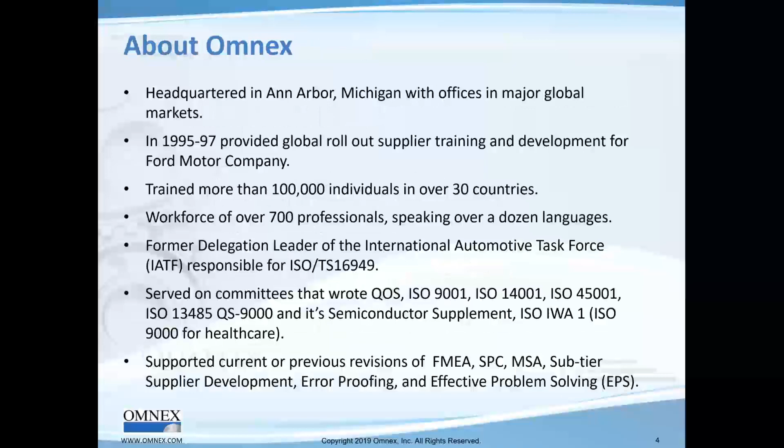So let's get going here. You all know Omnex was founded in 1985, about 33 years ago, and we focus on management systems, integrated management systems, Lean Six Sigma, and many other standards. One of the things I'd like to always point out when I do these webinars is about the global nature of Omnex and how we're able to provide services around the world for our customers, who need to, in fact, one of our customers with 26 different languages.

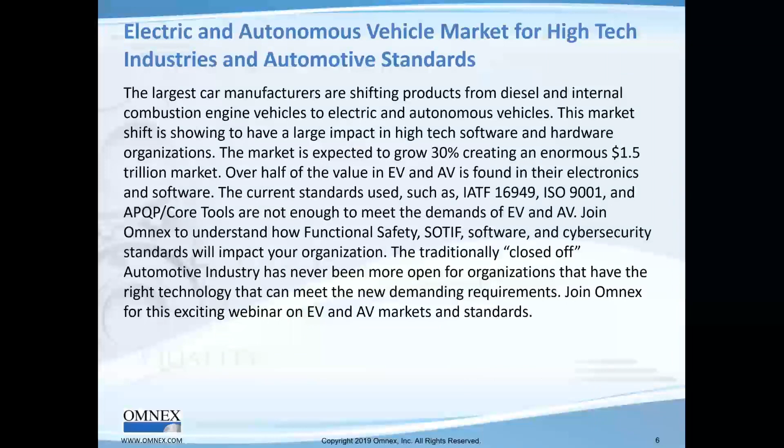All right, let's get right here to the webinar. The electric and autonomous vehicle market for high-tech industries and automotive standards. So what we'll do, we'll talk about what's motivating this change, the change towards safety, electric, and autonomous vehicles. I really lightened the next section on the AV and EV basics, and I'm planning to spend more time on the 7 pillars of electric vehicle and autonomous vehicles. And then we'll close the webinar, and we'll take a few questions as time permits.

Okay, so what is going on in this electric and autonomous car market? Simply said, it is countries phasing out gas and diesel vehicles. Here are some countries that have banned gasoline and diesel cars: England, China, France, India, and so on. There's a whole other list also, by the way. We just took some of them.

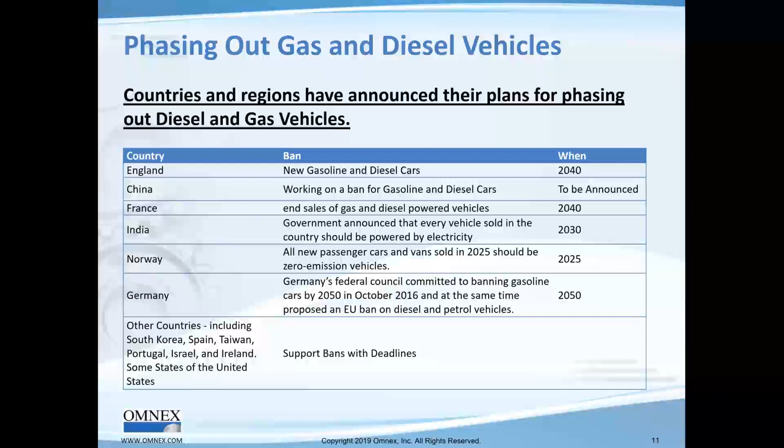So with this happening, what's also happening is GM has announced they're going all electric. They're going to phase out gas and diesel powered cars. Volvo, by the way, I happen to be in Sweden today as I do this presentation, where Volvo is pretty much in Gothenburg, where I am, is the company where I'm at right now. So Volvo says it'll end gas-only cars, and Volkswagen too. Really, in the end of the day, if GM and Volkswagen, the two largest car companies, have announced that this is the end of the combustion engine and it's going to go electric, pretty much you can expect everybody else will follow, and they are.

So let's look at the announcements that we're seeing. Here are the targets for electric vehicles by OEMs. Look at FCA, 28 new electric vehicle models by 2022. Mercedes-Benz, 10 new EV models by 2022, 25% of the group's sales planned by 2025. And so on, Toyota, more than 10 new models by early 2020s.

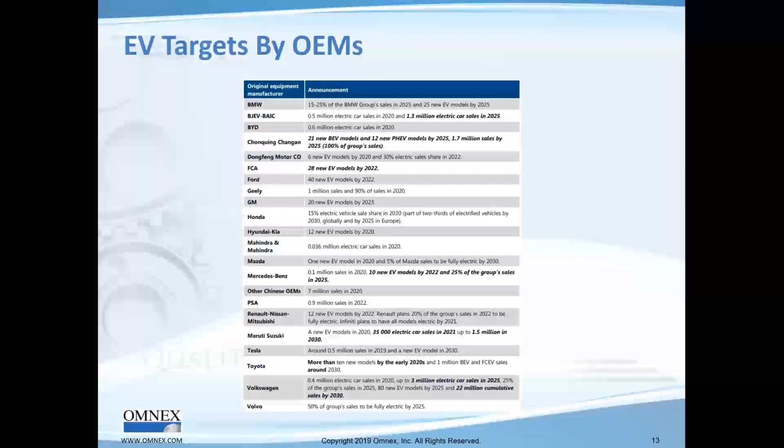So before that, what has been happening, let's say for the last 10 to 15 years, is a tremendous amount of safety going into cars. And of course, it was all cemented by this announcement in 2016 between the US Department of Transportation and 20 OEMs, with the agreement to make automatic emergency braking systems, okay? Backup cameras. In fact, there's a number of innovations from the last 10 years that have been rolled out, and I'll show you that a little bit later, that have come into the car.

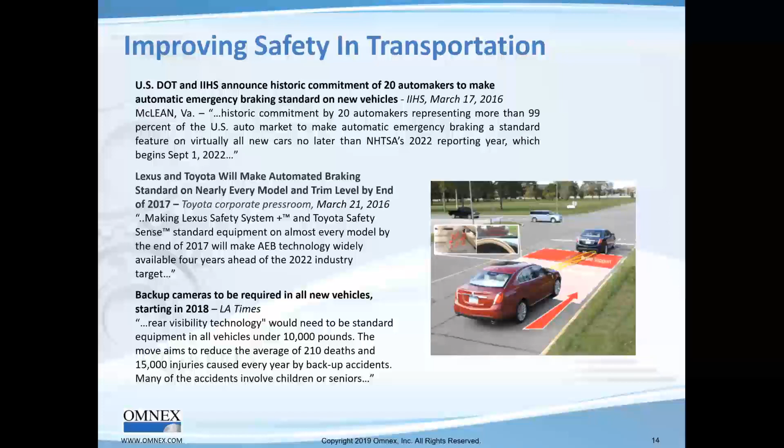So what is this? At the same time this has been happening, the electronic content in cars, both hardware and software, has been increasing tremendously. Between 2020, with about 35% of the car being electronic, it's going to go as much as 2030, 50% of the car being hardware and software. A tremendous amount of income or revenue being shifted from the traditional car makers to the electronics, hardware, and software car makers.

This is one of the reasons we're seeing a lot of new entrants coming into the automotive industry. As I mentioned in the summary for this webinar, this is the most open time in terms of somebody trying to enter into the car market. This is the time, if you have the right technology, the right innovation, and the right management systems in terms of being able to produce functional safety, cybersecurity, ASPICE, this is a wide open field for companies who are able to do that.

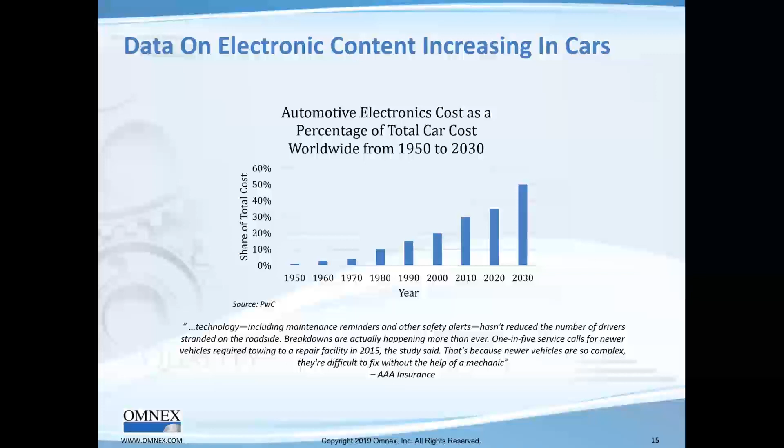So, safety coming into the car, the electronic content increasing in cars, of course, what can you expect? At the same time, what the car companies are seeing is an increase in the number of warranty recalls due to software. Those numbers say 15%, and it goes back to 2016.

I did some work with a truck OEM, and what they told me is they're seeing much higher percentages in terms of software recalls. In fact, he said 50% of their recalls are software related. So software is coming to be one of the key areas that the automotive industry is focusing on. And so you can just imagine that's why we're seeing things like ASPICE and, of course, Part 6 in ISO 26262.

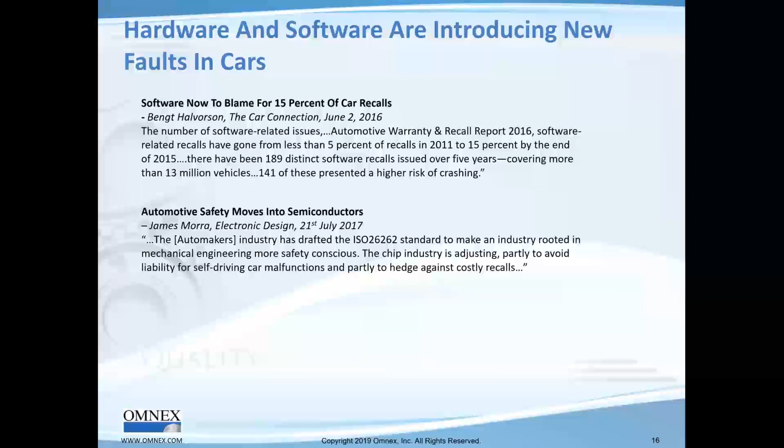All right, let's move on. So going on, in terms of understanding the shift into electric vehicles, suddenly you're seeing all these global alliances and agreements happening. So what is the bigger picture of the change that's happening today? The bigger picture, of course, is that electric vehicle is where the car industry is starting, with the goal of going into autonomous.

In fact, we facetiously say in the conferences for autonomous vehicles that there's a gold rush on. And indeed, the car company that's able to come up with a level 4 or level 5 autonomous car really is going to clean up. It's a huge amount of revenue. In fact, 1.5 trillion is what we're looking at in terms of the autonomous car market.

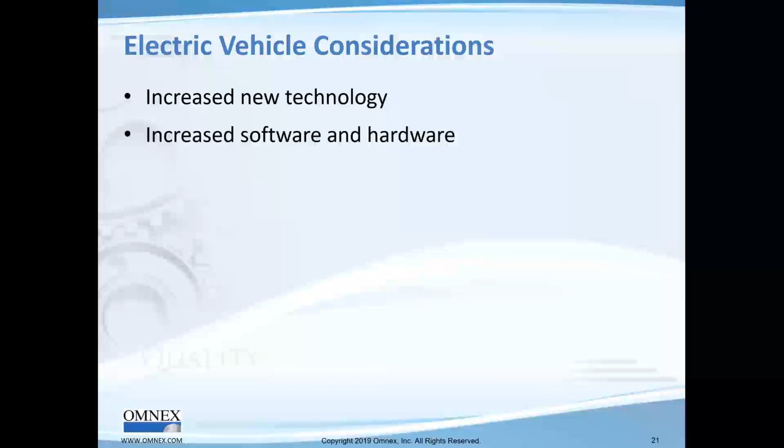All right, so I think it's very clear to all of us what then is the motivation for all of us, the OEMs going electric, and then of course for all of us in the supply chain, also being implicated and also having to change.

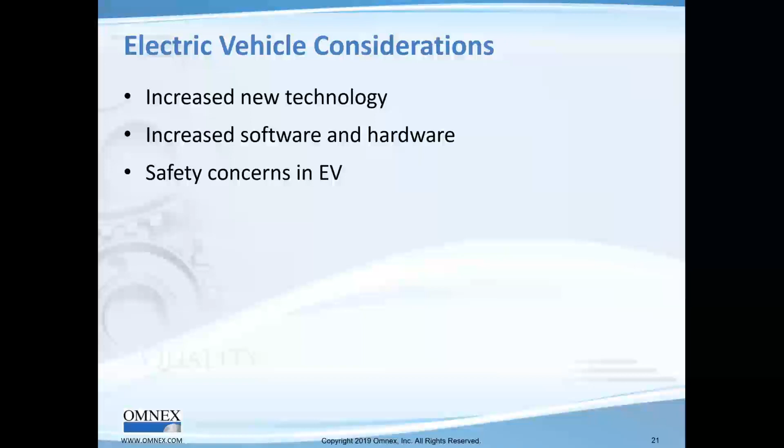So what then is the impact of these electric vehicles? It's the increased new technology, increasing amount of software and hardware. Let me just say, the electric vehicles of today are very, very connected. And when they're connected in this fashion, definitely there's cybersecurity. As soon as you talk about high voltage, and the power modules and the battery, a tremendous amount of functional safety is needed also. And there's also supply chain.

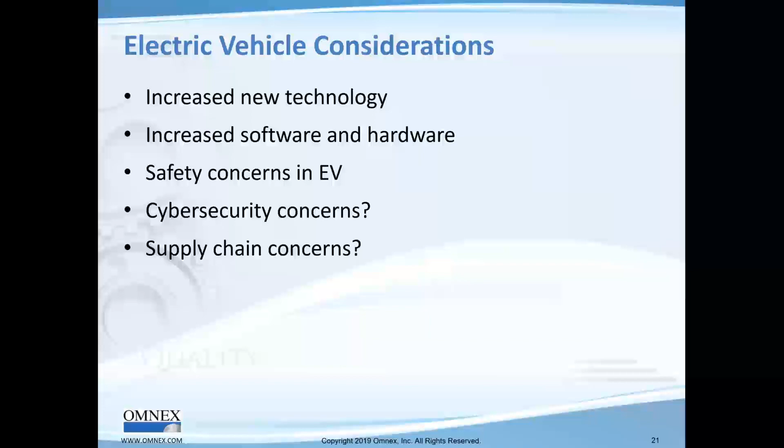And General Motors, though it's gearing up for a lot of electric cars, is using the Super Cruise features right now in a mechanical Cadillac. Okay, it's a mechanical car is what I meant to say.

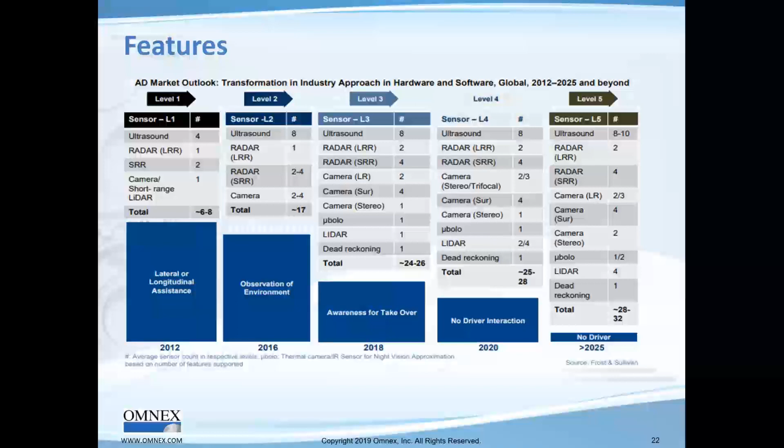Those are examples of level 4, or a vehicle operating autonomously on the highway. Going from level 3 to level 4 is a big deal, but going from level 4 to level 5 is an even bigger deal, because a level 5 vehicle is going to be able to operate in any different environment. So that's the idea of going from level 1 through level 5 - let's take a look at what has happened in the last several years.

Remember I talked to you about ADAS, the active safety and driver assistance. Look at the number of safety features that have come out, again in 2016, and then you're looking at 2018. You're seeing a lot of things in terms of highway driving.

And then in 2020 is when they're seeing the advent of what they call the disruptors, with Waymo, Lyft, Uber and Apple coming in, and so on, where we don't really know exactly when level 5s will come in. But I'll tell you, there'll be a great market for level 4 vehicles itself, and it is going to change things in a big way, even if you just get a level 4 vehicle, especially in highway driving.

It's something maybe we can take off and discuss at another time, what that means, but this is the roadmap, and this is what everybody's working towards. I can tell you this: whoever reaches level 4 and level 5 is going to clean up. And even if they get a year before anybody else, or two years, three years, or five years, they're going to become some sort of a monopoly player in the market.

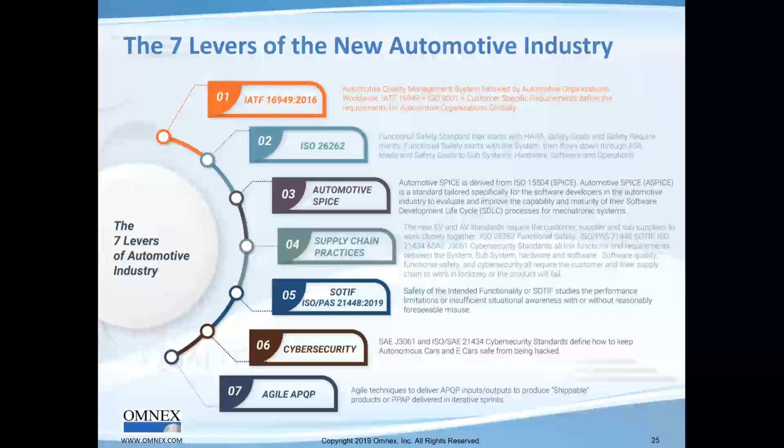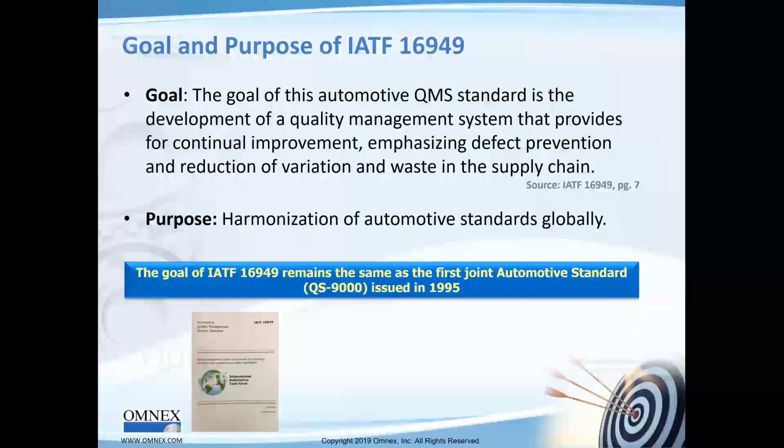What we're saying is systems engineering with the architecture of system, subsystem, hardware and software architecture, with the requirements flowing down between the system, subsystem, hardware and software, the traceability of requirements, and the engineering V model, designing in concert, is going to fundamentally change new product development.

I'll say this is really phase 2. Folks, we have written a white paper on this subject. Please talk to your Omnex representative and get this white paper, which really focuses on product design and development, the impact of product design and development using these 7 levers that we're talking about.

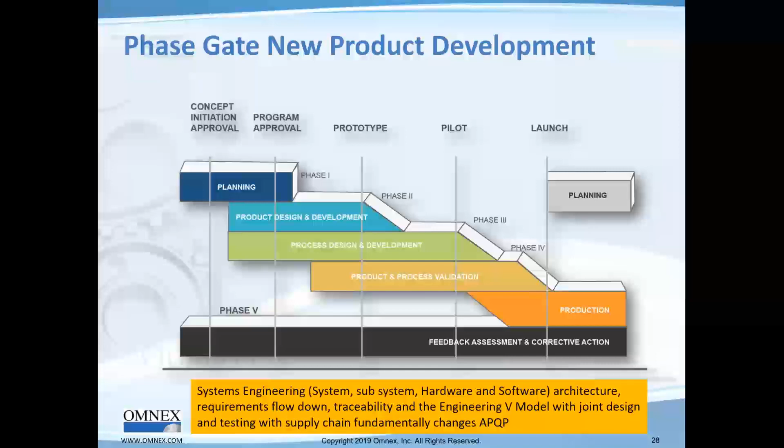But the first item on the 7 levers is the IATF 16949 and the core tools, and we're just mentioning as we go forward to the next different competencies that APQP itself is going to have to fundamentally change.

So what are we going to have to incorporate into this APQP? We're going to have to incorporate and link, because some of the software and hardware could be with our supply chain. Keep that in mind, and keep in mind also that building a system or a subsystem at a tier 1 level is way more complicated than the 4 levels we show here.

So what are we saying? We recommend that the DFMEA with the DVP&R link be used so that you can have the systems flow down. And folks, you can do the systems flow down.

It's built into the AIAG VDA, or you can do it to the 4th edition, but you're going to have to use the flow-down mechanisms that software like Omnex's software has built in. If you bring in all the different players, automatically the system requirements, the subsystem, software and hardware will flow down. And doing the DFMEA and the DVP&R, automatically you'll get test plans which will do the test flow up.

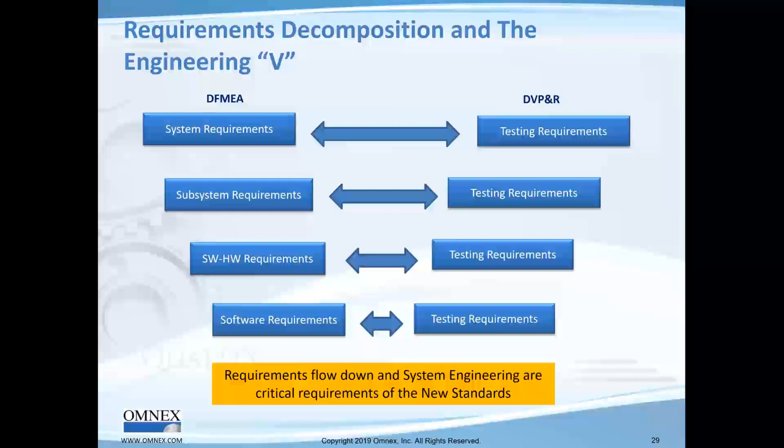So that's the first section, just saying that the IATF 16949 and the core tools are going to fundamentally need to change because of some of the requirements of these other systems that we're going to talk about.

The second one we're going to talk about is Automotive SPICE. We always say Automotive SPICE is a framework for software, but in the end of the day, it really links systems. It's got requirements for systems processes and software processes, and I'll explain that to you a little bit more.

But Automotive SPICE, as you all know, gets pulled in through embedded software requirements in IATF 16949. Pretty much we have two options: we can do CMMI or Automotive SPICE. And the reason Omnex is talking to you about Automotive SPICE is that the European OEMs are requiring it, and so is Ford Motor Company and FCA.

I really haven't checked in with GM, but pretty much all the OEMs are going Automotive SPICE. So really, Automotive SPICE is the option to use for embedded software.

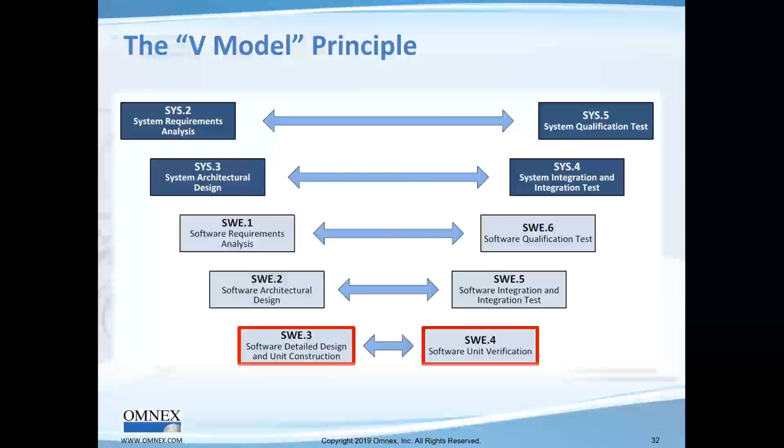Let me just go back to the previous slide, just to give you a different view of that same engineering V. When you look closer, you see SYS2, systems requirements analysis, flowing into the architecture analysis of the system, then going to software design, software architectural design, and then unit design. On the right-hand side, you see the unit testing at SWE4, the integration testing of the modules of the software, and SWE5, which is software engineering 5, or the qualification test, SWE6, and then building it into the system. So I hope it's clear to you that when you talk about Automotive SPICE, it's system requirements and software requirements.

And as you look at this, you can see some new processes that aren't in IATF 16949, like configuration management. By the way, configuration management is not just for product, it's also for all the work products, all the records. You can see overlap with IATF 16949 as soon as you say problem resolution management, change request management. These are processes we already have in IATF 16949.

So the most important process in ASPICE is MAN3, or project management.

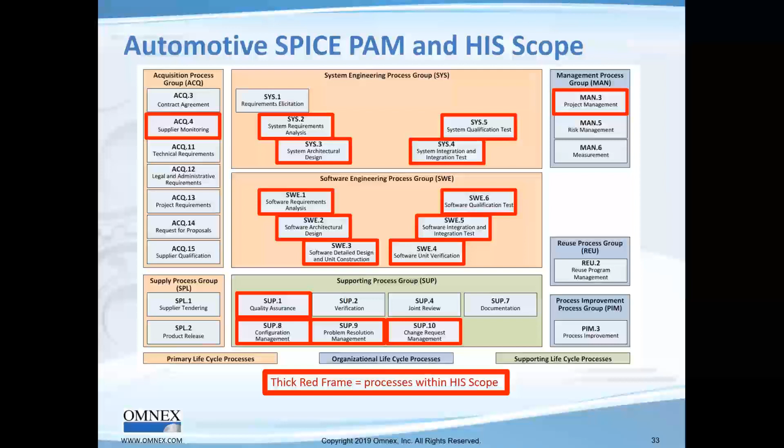Okay, so we have all these processes, and what I mentioned to you is that the customer wants at least a level 2 ASPICE requirement. So let's try to understand what this means.

Well, if you have no processes in place, you're at level 0. If each of these processes has something called base practices, anywhere from 6 to 8 or 9 different practices that have to be implemented, and if you have them implemented, you are a level 1. Then on top of that, if you're planning your process and planning the work products, you are a level 2 — that's managed. Up to level 2 you can practice in your projects, but to get to level 3, you have to have an organizational definition of processes. Suddenly it's a standardization of the ASPICE processes with something called tailoring built in.

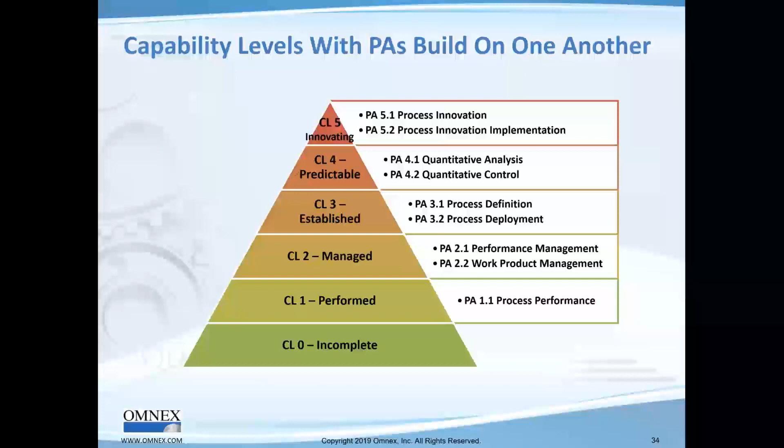So really, the customers today want us to go to a level 3. But keep in mind, many of you are thinking it's just your software groups that have to be brought in. You have to realize it's not just software, it's also the system and the software.

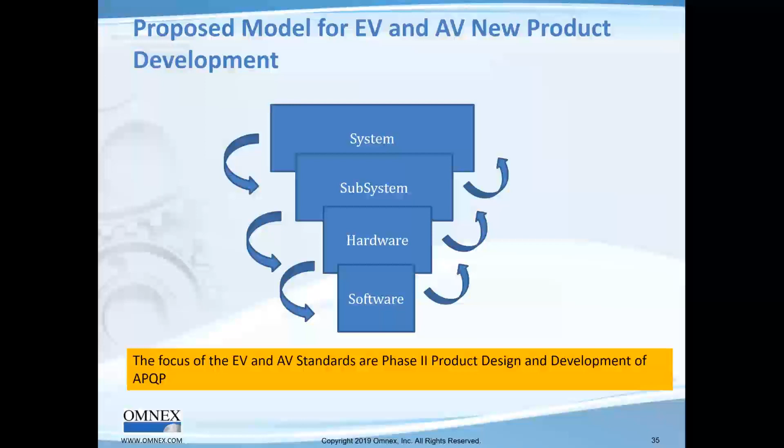And that system is at the highest level of IATF 16949, clause 8, especially 8.3. So what we're seeing here is I've just drawn for you phase 2. Everything has to be lined up in phase 2. Why? Because requirements flow down and then testing flows up. If testing has to flow up, my software testing has to finish and be integrated into the hardware and software, integrated into the subsystem, into the system. Do you get that? So we have these V's going on in phase 2 of APQP.

Let's go on to the next section, which is ISO 26262. ISO 26262, Omnex started practicing in 2009. The standard came out in 2011, and here we are in 2019. And I was just in the Omnex's Berlin office yesterday, and I'm going back there tomorrow, or day after tomorrow.

And people are practicing and building safety products without 26262. As a hindsight, companies are calling us in to do assessments quite late in the game, and we're finding a tremendous amount of things missing. So even though 26262 has been here for a while, people have just not implemented it.

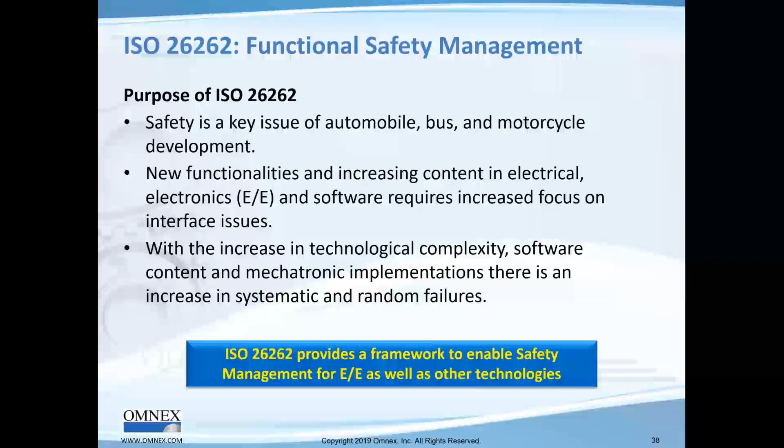And why? You saw this graph on E&E, the amount of electronics and software. So there's new functionalities, increasing content in electrical and electronics and software. And that's the focus of ISO 26262, to deal with this technological complexity, the software content, and what we call mechatronic, the mechanical and electronics implementation. And what's the big deal? The big deal is the systematic and random failures that we're going to see versus single point failures we saw in the past. Well, more about that later.

So ISO 26262 then addresses hazards caused by malfunctioning behavior of this E&E safety related system. So the scope is product safety, and it's about electronics, electrical, and software. Okay, it's a narrow scope. What does it not address? It doesn't address hazards related to electric shock, fire, smoke. These are the byproducts that could happen. Okay, it doesn't address that.

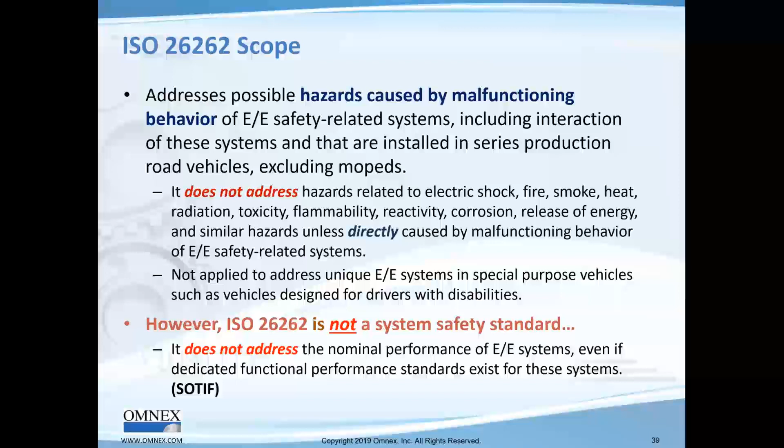And then look at the bottom there. It does not address the nominal performance. So after the designer is finished with the functional design, if there's any design defects in the function, or if there is opportunity for misuse, it's not addressed in ISO 26262. That requirement has been given to SOTIF to sort out. We'll talk about that in a second.

So pretty much what you're seeing here is, I like to tell people, part 2 and part 8 align with IATF 16949. Part 3, the concept phase, is entirely new, that we don't have at all. It needs to be added in. The whole idea of item definition, HARA, and the safety goals and the functional safety concepts. Folks, those of you saying, well, that doesn't apply to me, you have to, even at a chip level, define what is called a SEOC, safety element out of context. It has to be defined in the concept phase with assumptions on the hazards at the system level. Once you do that, part 4 is system, part 5 is hardware, part 6 is software. And all of that aligns with phase 2 of APQP.

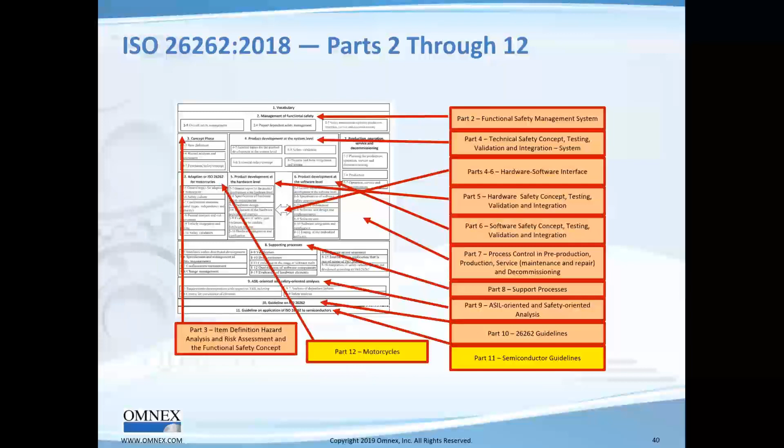And of course, today we have part 11, the semiconductor guidelines, and also guidance for motorcycles.

So how should we think about ISO 26262? ISO 26262 is a subset of the product requirements. It has a lot of additional requirements for the subset of requirements in system, hardware, and software, and definitely has overlap there with ASPICE. All right, let's go on.

Next, we have SOTIF. SOTIF is 21448. It's a publicly available standard, so it's a guidance standard. After the designer is done, it deals with the resulting functional insufficiencies. Let me give you an example of insufficiency. This is not a safety example, but you'll understand.

We had just finished an ASPICE assessment of what's called a kick sensor. Are you familiar with it? You go to the back of the car, by the trunk, and kick, and the trunk opens. So I bought a brand new car. I have this habit of putting my keys in my briefcase. I walked up, kicked it with the kick sensor, and it sensed the key in my briefcase and opened up. I put the briefcase in, kicked it again, and the trunk closed. Now I go to the door and try to open it. It won't open. So I go back to the trunk and try to kick it again, and it won't sense it.

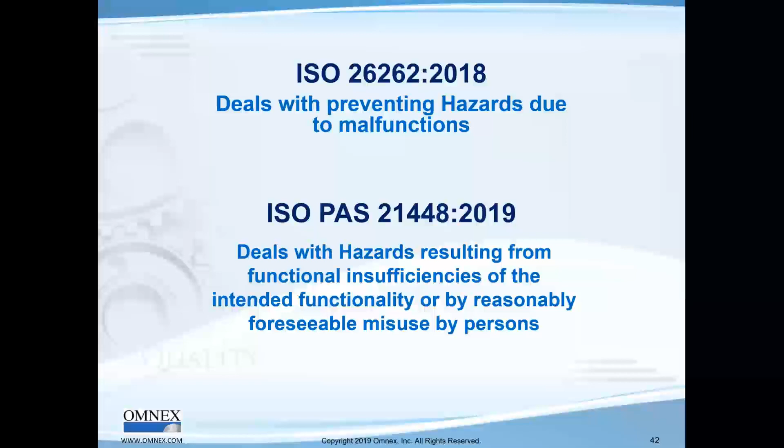Why I like to talk about a small development like a kick sensor is to show you SOTIF applies to any kind of subsystem of a car's development. We all think of it in terms of an OEM requirement, going from level 3 to level 4 to level 5. The idea that the car should meet all the different scenarios in terms of city driving, highway driving, etc., is about scenarios. But scenarios apply to small subsystems too.

So what is a scenario? A description of the temporal development between several scenes in a sequence of scenes. Each scenario starts with an initial scene - key in a briefcase, walking towards a car, kicking it open, putting it in. All that is a scenario.

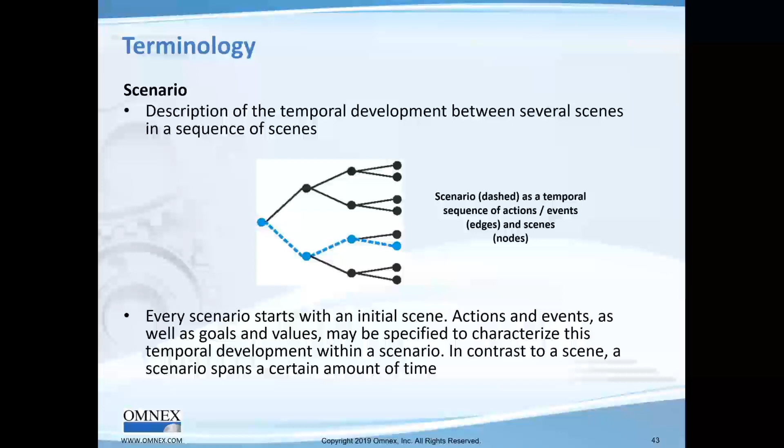And there's a triggering event, a specific condition of a driving scenario. Remember, this is about safety. My kick sensor example wasn't about safety, it was a scenario the designer didn't think of and didn't design correctly. But in a true safety case, it's a driving scenario that serves as an initiator for a subsequent chain reaction leading to a hazardous event. What's the example?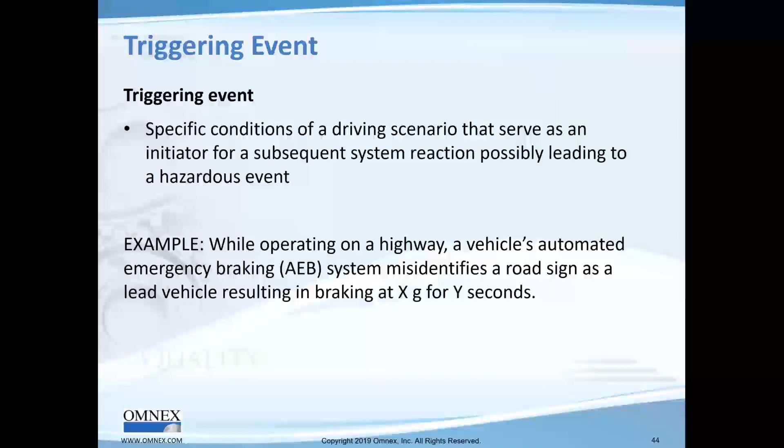While operating on a highway, the car misreads a road sign as though it needs to brake. The emergency braking system comes on, making the car stop in emergency, maybe even the airbag going off. So it's a very unsafe situation, a scenario that resulted from misidentification of a road sign.

SOTIF and ISO 26262 I put in the same subset. Of course it's a different set of safety requirements, and SOTIF also has a different set of criteria for defining required testing. Pretty much what Omnex does is take the SOTIF requirements and make them part of the functional safety requirements, allocating them down into the subsystem, hardware, and software, very similar to ISO 26262. But ISO 26262 has something like 16 tables in hardware and 18 tables in software for design requirements and testing. SOTIF has much less.

So that's 26262, SOTIF, and ASPICE. Folks, I'm running out of time.

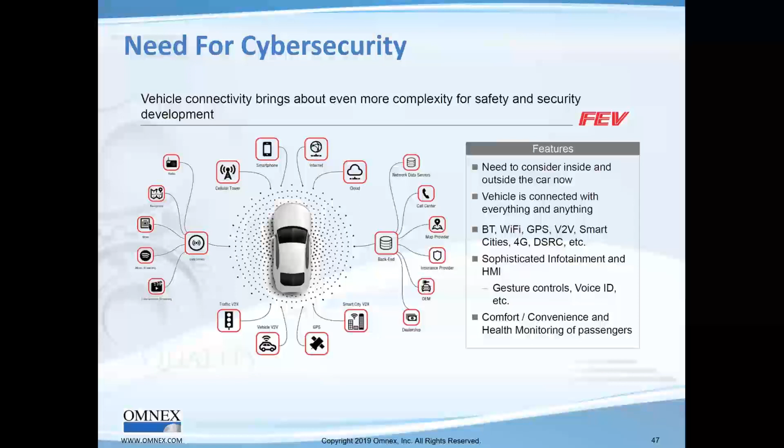Next is cybersecurity - SAE J3061. We're on the writing committees, as we were for 26262. We're on the writing committees of SOTIF and ISO 21434. We already have training for 21434, and integrated training with SAE J3061 guidance and SAE 21434. Why? The car is tremendously connected - cellular phones, internet, cloud, maps, and connecting for emergency help. So we have a tremendously connected car, and it's going to get even more so.

What's going on? Well, there's a lot of threats in the landscape - well-financed attackers, individual hackers, amateurs, insiders inside our companies, all trying to break in and do malicious acts.

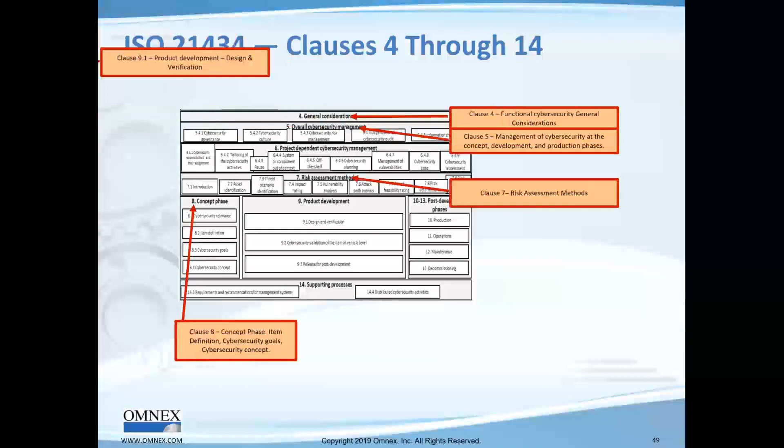So we have 21434, very similar to ISO 26262. It has a concept phase, a product development phase with system, hardware, and software allocation and development. Just like we have the HARA leading to the functional safety concept, for cybersecurity we have a threat and risk analysis leading to a cybersecurity concept, to cybersecurity requirements, to system requirements, which then get allocated down.

What we wanted to show you is that the functional safety requirements and cybersecurity requirements go into the overall product requirements and then get allocated. And the biggest difference between cybersecurity and functional safety, of course, is one is safety, one is cybersecurity threats, one is hazards. But...

Cybersecurity threats could become safety issues, number one. But the biggest difference is that once you've designed a safe car, you're finished. With cybersecurity, the hackers are getting more and more clever in terms of trying to break in. So cybersecurity is never finished. You have to continue developing your defenses against cybersecurity hackers as an ongoing effort, and you have to download it to the car with an OTA.

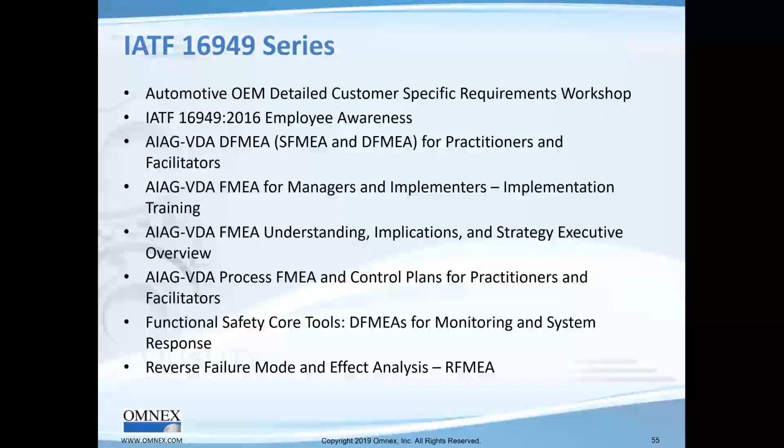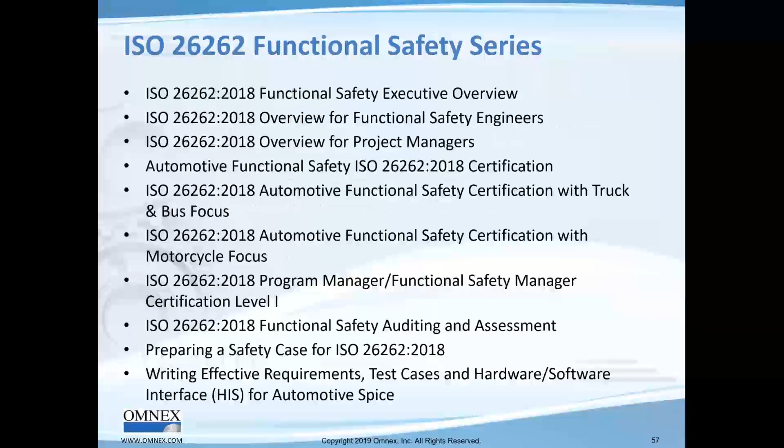So, training, we have an Automotive SPICE series. We have also added an INTACS training course if somebody would like to become a certified ASPICE trainer. We have training for SOTIF, Agile, functional safety, lots of different training for functional safety, and cybersecurity.

And I believe we also have a general class. We thought engineers might need an introductory class to autonomous and electric vehicles, from a safety and cybersecurity perspective, or an introduction to systems engineering. This is some of the competencies that are lacking today.

So with that, what I'll do is take two questions that people have posed. Let me try to understand this question. How are these requirements being implemented in the various autonomous driving setups?

So let me just mention to you that I'm seeing it implemented, but not being implemented very well. In fact, I think maybe the German and American OEMs are doing a better job than maybe OEMs in some other parts of the world who are trying to put in ISO 26262 a little late. In the US, I'm seeing a siloed implementation where in product design you have a separate functional safety group and a separate cybersecurity group. And fundamentally, we cannot do a good job if we're going to silo the effort. I'll just leave it at that.